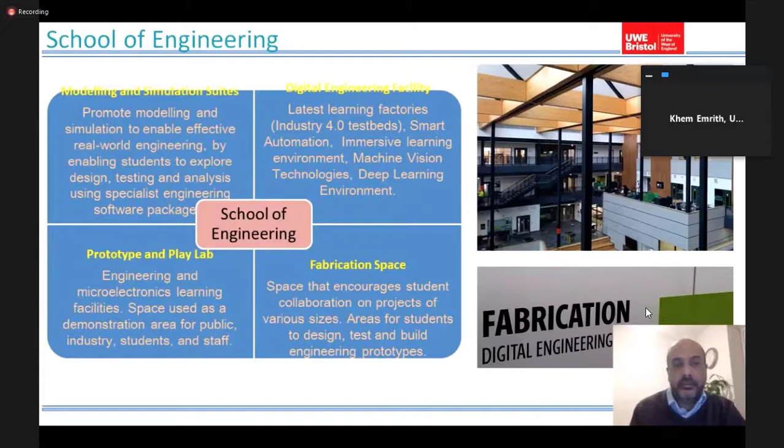The School of Engineering also houses an innovation space called the Digital Gallery. The Digital Gallery will contain a number of cutting-edge engineering setups or kits that will promote more hands-on learning experiences and at the same time strengthen academia-industry collaboration.

One of the setups that we will have is called a cyber-physical factory or lab. This cyber-physical lab is actually a smart factory setup that will allow our students and staff to work on the latest smart factory projects.

The Digital Gallery will also host an immersive environment, an immersive cave, a virtual reality environment. This virtual reality environment will allow students to understand engineering processes within a more realistic environment.

There will also be a driving simulator. The driving simulator will allow access to the latest vehicle technologies and interactions with these latest vehicle technologies.

Among other facilities, we will have a 25-seater augmented/virtual reality lab. There will also be high-performance computing facilities and an area dedicated to machine vision and automation.

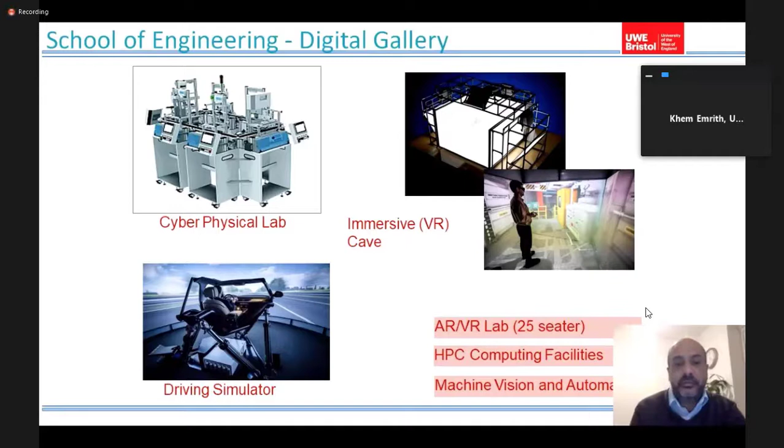Now I'm going to leave the floor to my colleague, Praminda, who is going to give you a tour of the assisted living studio at the Bristol Robotics Lab, and also talk to you about how research is translated into teaching within the School of Engineering.

Hello everyone, I'm Praminda Caleb Solly. I'm a professor of assistive robotics and intelligent health technologies here at the Bristol Robotics Lab at the University of the West of England. You can see an image of me in the top right-hand corner of your screen. The reason you can see me up there is because I am on a telepresence robot, and we are actually in the Bristol Robotics Lab.

This is our assisted living studio, and as part of our research here in the Bristol Robotics Lab, we're working on developing socially and physically assistive robots to support people with activities. In this Disability Rights and Robotics project, we're starting from disabled people's rights and asking how can robotics technology support everyday rights to participate in all aspects of life to the fullest.

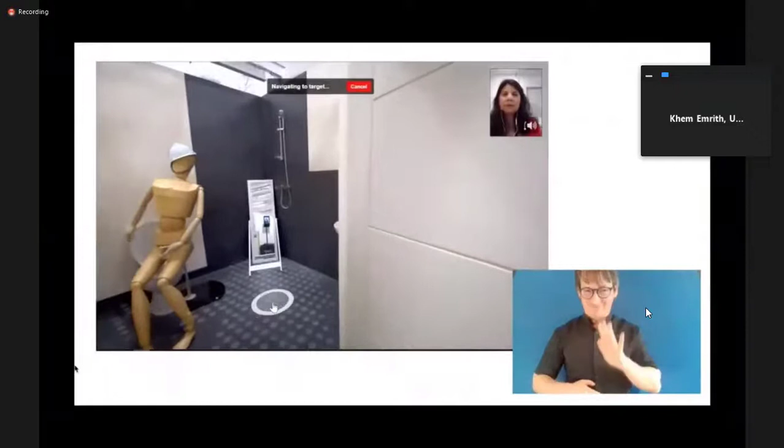And let's wait, you can see that's the bedroom. We're going to go in there later. Let's try and make our way into here - there's a bathroom. And the reason we're going in here - oh, excuse us, Mr. Woody, we'll only be a moment.

The reason why we're going into this space is because there's a mirror. And as you can see, the reflection in the mirror, that's what the telepresence robot that I'm driving around looks like. At the top is a screen, and you can see a picture of me on the screen. So the people in this space with the robot could imagine that I was there with them, except that my body is a pole, and at the base of the pole is a balancing barrel, a Segway, with two wheels on either side, and that helps to move around. I use my keyboard and mouse to move forward, backward, left or right, like this. Or, as you will see, I can select a spot to move to, and this telepresence robot finds its way through the door without bumping into anything.

So let's go back into the living room. Actually, this is a good demonstration of what makes this telepresence robot a robot. It's using sensors that can detect obstacles. So if I change the screen to show you what its obstacle map looks like, you can see on the bottom left-hand side of the screen, things are showing up as obstacles. So it's using cameras and lasers to identify where the obstacles are, and then it can navigate around them.

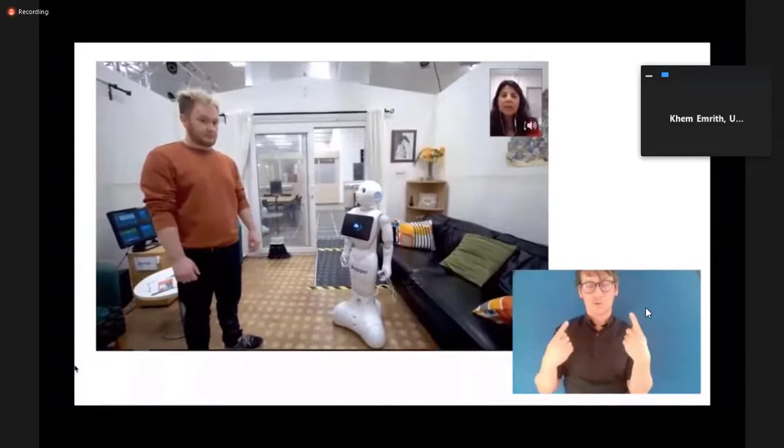So Pepper is a good example of such a typical robot. A robot is a machine that has sensors to get information about what is happening around it or to it, like the sensor we saw on its head or the microphone it's using to listen to sound. And it responds to things people say.

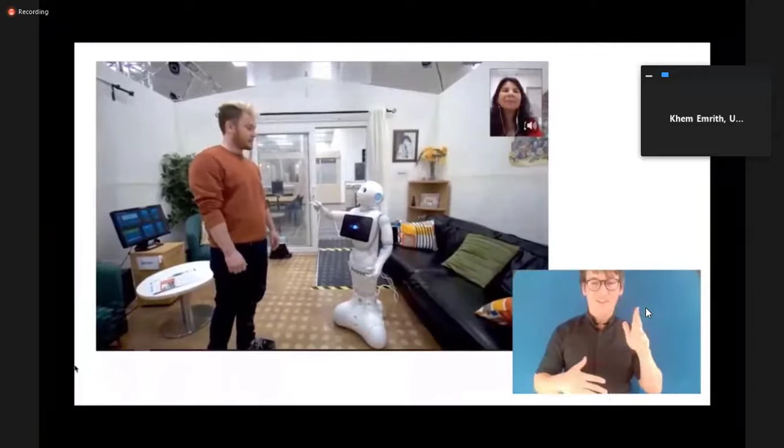So if Alex speaks to Pepper: Speak louder, and turn up my volume. Hello, Pepper. Hello, human. How are you? How are you? I'm always feeling good. Thank you. How's it going? I'm good, thanks. So both of us are doing really good.

So there was a little bit of social interaction. Thanks, Alex. So based on the data that it gets - in this case it was Alex speaking to it - the robot can plan what it needs to do next, so what it needs to say or how it needs to respond based on how it interprets the data it gets from the sensors. In this case, the sensor was the microphone. This is where it uses artificial intelligence to decipher the data from the sensors and make a decision on what to do next. And then it takes an action - the action was it responded or replied to the speech interaction that Alex was having with it.

So we are developing robots like Pepper here to act as a person's personal assistant or coach, particularly if they need some extra support or reminders. Pepper can provide personalized assistance exactly when and where someone needs it. So we'll see a little demonstration of this - imagine if Pepper needs to give Alex some important instructions about his medicines.

Pepper needs to give this instruction exactly when it will be most relevant to Alex. This studio is filled with wireless sensors that can detect events such as somebody moving around in the room or opening and closing the drawers or cupboards.

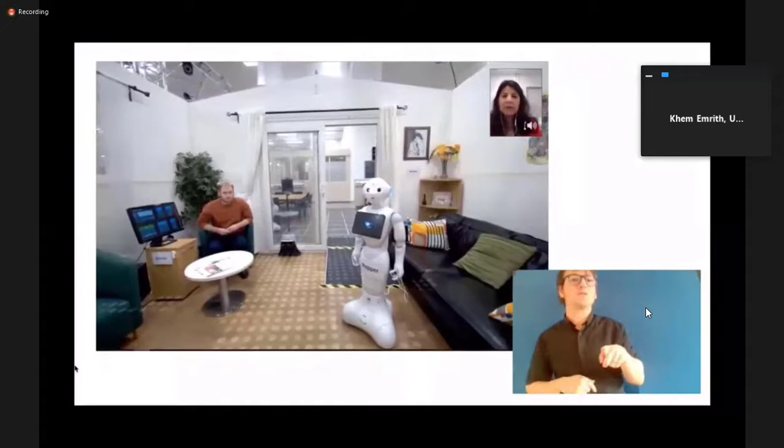That was Pepper providing the right information to Alex so he remembers not to take those medicines on an empty stomach. This studio is fitted with lots of different sensors. These wireless sensors help the robot understand what the person who might be living in such a space might be doing, using this information to provide the right support at the right time.

I'm going to zoom in to another sensor, a motion sensor on top of this cabinet. You can see this little round ball. That sensor can detect movement in the room. It can also pick up light levels, temperature, and how much battery is left.

All of that information could be used by a doctor to find out if the person is not very well. For example, if it was detected that they weren't moving as much as they normally did. You can see here a dashboard with lots of information showing the status of the different sensors in the room.

If we can just about make out the fridge there, and if Alex goes and opens the fridge, you should see the status of that changing. So Alex, if you could open the fridge, please.

Pepper will give a reminder to Alex when you open the fridge as well, so listen out for that. You can't actually read that because the resolution of the camera isn't that good at the moment, but it says open at the bottom there. And then when it's closed, it should go back to closed.

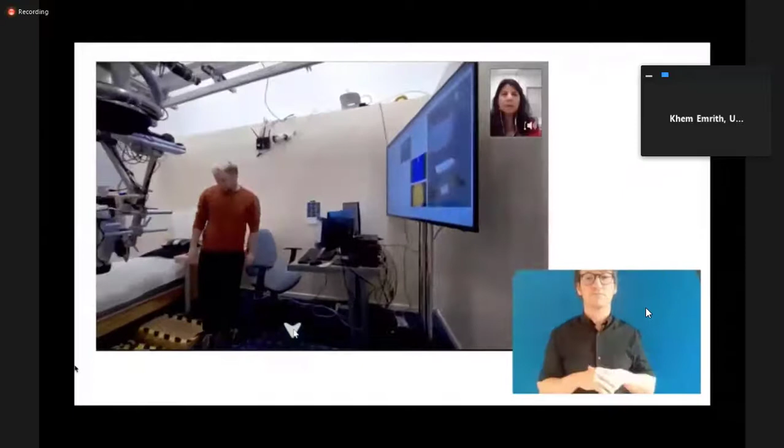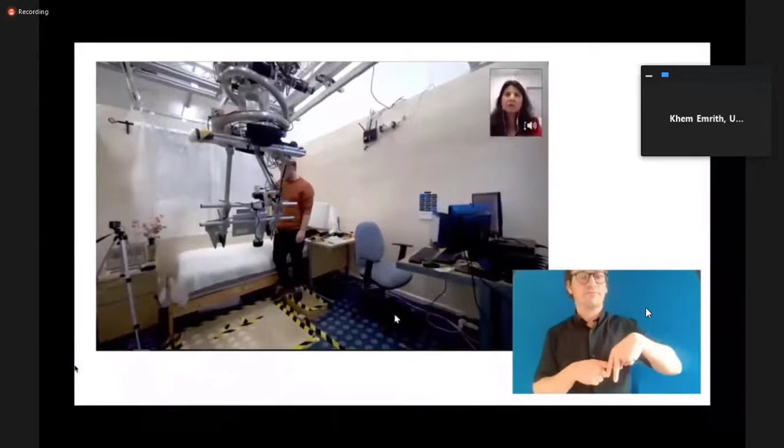Making our way into the bedroom, just going to go a bit closer so we can get a good view. We'll see the screen there and I'll explain some of the stuff about the data. So here is Alex. This is the Tyron Sit to Stand robot. As you can see, it's also attached to ceiling hoist tracks. But on this end, it is designed so that it has stable hand support on which somebody can lean as it moves up and across, helping them up and out of bed, and also perhaps walking by themselves to the toilet or to the living room or to answer the door.

Alex, could you please give us a demonstration of this? Thanks.

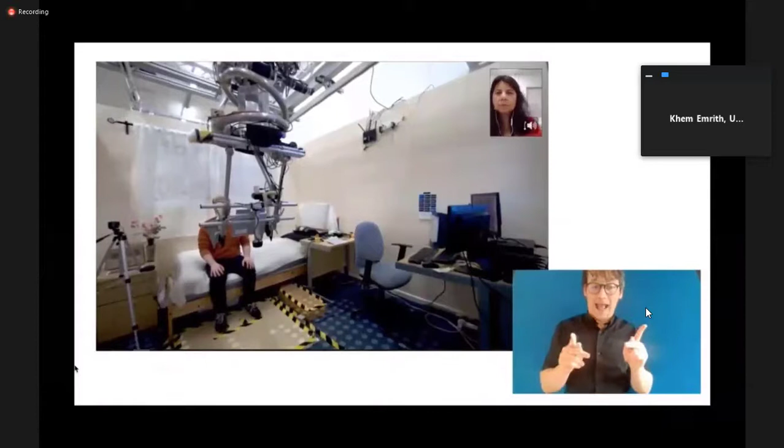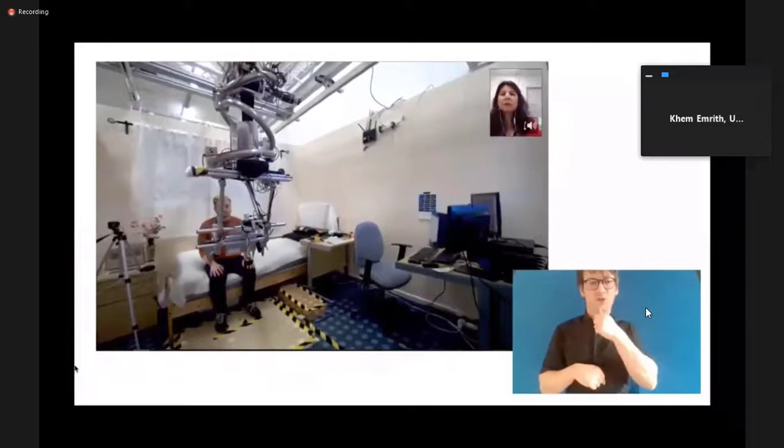I'm sending Tyron to you now. Be careful as it moves. You can adjust the hand grips so they're in a comfortable position. So Alex there used the Google Home Assistant, so we use that to have voice commands which can then be used to control the robot.

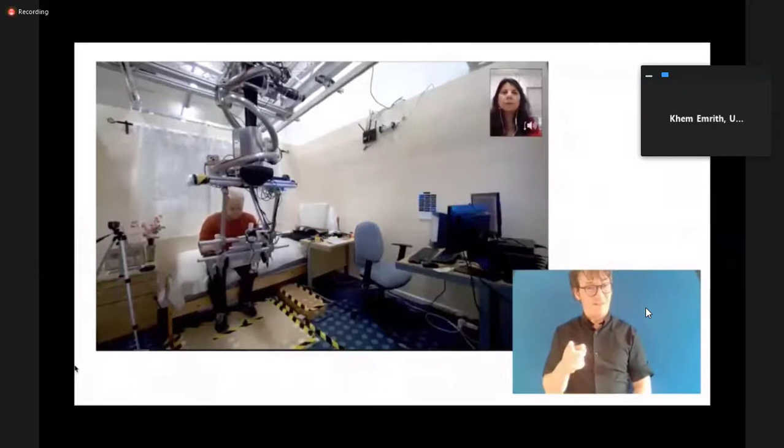Hey Google, I'm ready to stand. Okay, ready, steady, stand. So there you can see the robot is slowly rising up and Alex is leaning on it, and that's helping him to stand up. There you go.

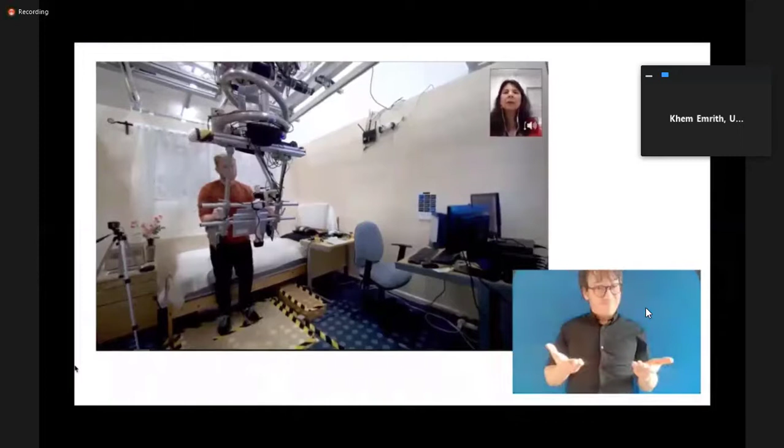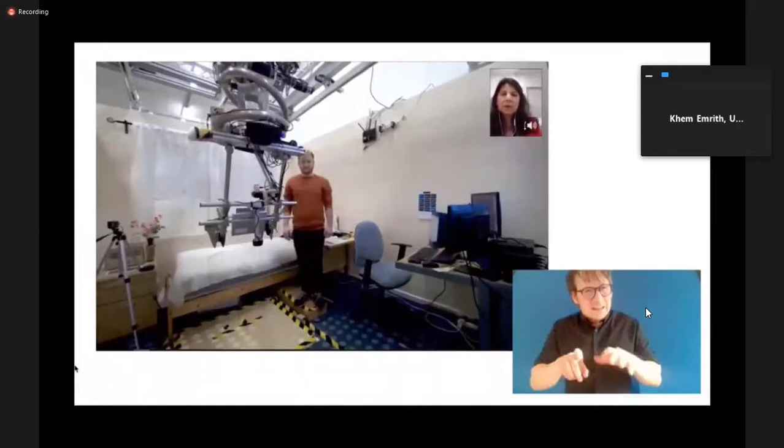This robot looks a bit clunky. It's a very first prototype, but it also looks the way it is because we've designed it to be really strong enough to be able to support the weight of a person. And it has a number of sensors to be able to sense that somebody is leaning on it, whether they're holding on to it and how much force they're putting on it, or if they're losing their balance and falling. And it also has cameras, and all of this data.

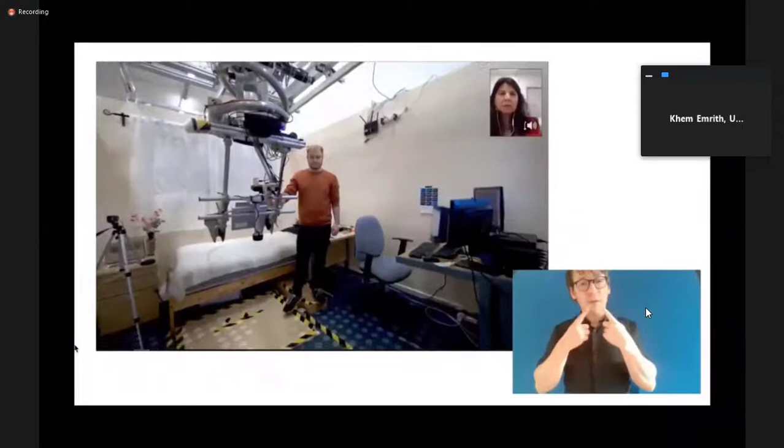We use all of this data. Let me show you some of this data on the screen here, to be able to help the robot operate safely and autonomously in real world situations and be able to react to new situations in a predictable way.

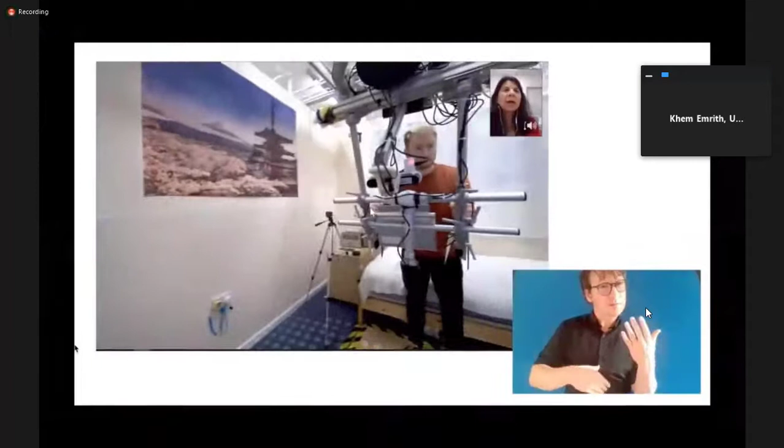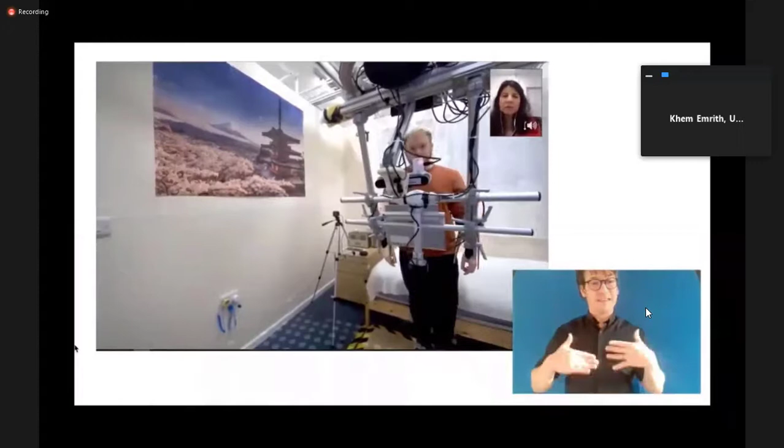So that was a physically assisted robot. Thanks for that demonstration, Alex. We're going to go back into the living room now.

I'm going to end this tour and go on to a question and answer session.

But before I do, I just want to say a little bit more about this telepresence robot that I'm using to move around the space. Using this telepresence robot, I could visit this studio from anywhere in the world, anywhere that has an internet connection. And in fact, there is a robot just like this at the Saatchi Gallery at the moment.

It is part of one of our Arts and Humanities Research Council projects on Disability and Community, and it's being used by people who are socially isolated and still in lockdown to visit the gallery.

In fact, some schools have used these types of robots so that children who are ill or vulnerable to getting infections can still attend school and move around the classroom with their friends.

So you can see there are lots of different applications for robots, and I hope that this tour has got you thinking about the different ways in which robots and sensors can be used together to help people in many different ways. I'm sure we've got a lot of questions, so I'm going to end the tour now and go on to the question and answer session.